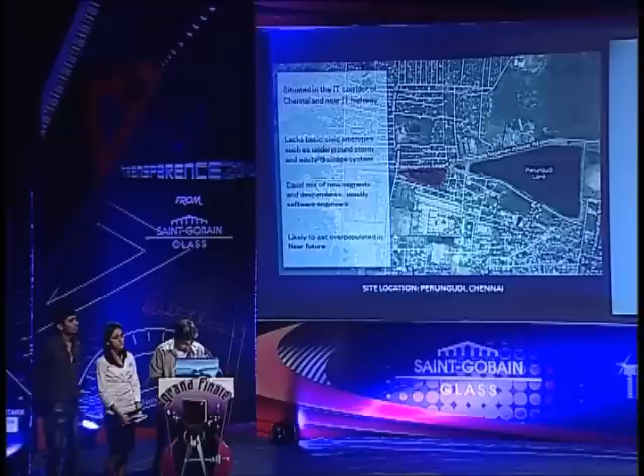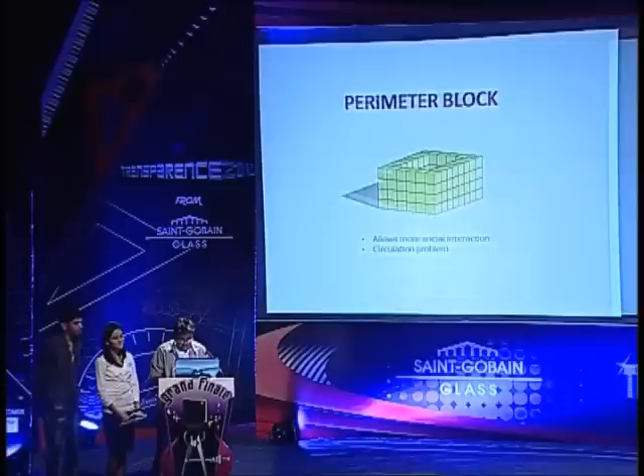To arrive at our form, we made a close study of the pros and cons of present housing patterns. The skyscraper pattern has high maximum population but has a problem of shading and ventilation. The perimeter block allows more social interaction but has circulation problems. The unit modular provides individual space units but has less social interaction. The modernist slab has maximum population fitting but has a problem of natural light.

Based on the study, we formulated our aim as to maximize the number of dwelling units and provide better space allocation, maximum light and ventilation, to have a unified structure with less class disparity and provide more social interaction. Keeping in mind the site attributes like sun path diagram, rainfall, and temperature, we evolved our design process in the following way.

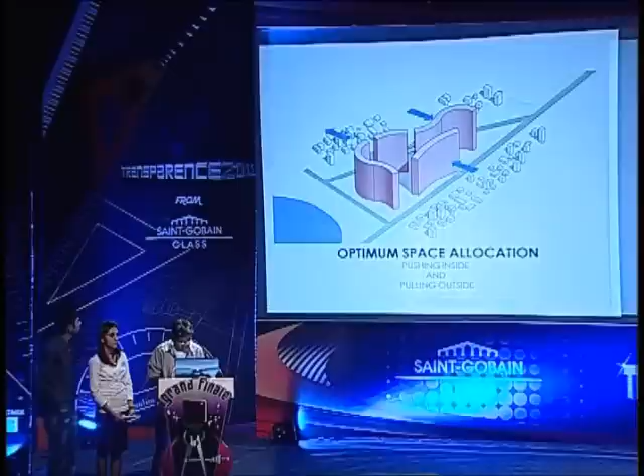For maximizing the population, a perimeter block was selected. This was pushed in and pulled out at strategic points to make space for circulation and service units. Keeping in mind the wind direction, height variation was made at certain points to catch maximum wind inside the site. The individual blocks were staggered away from each other.

It allowed 4 open sides to the unit blocks, providing proper ventilation. Climatic simulation showed that it helped in reducing building temperature by convective cooling. Regular punctures inside the form helped to make the building cyclone resistant.

Research on biomimicry and green architecture shows that people are more comfortable with naturally occurring, free-flowing structures. Our design maintains the same fluidity and at the same time maintains the linearity of unit blocks. So summing up the entire form evolution process, we reveal to you Sharanam, Housing for Future.

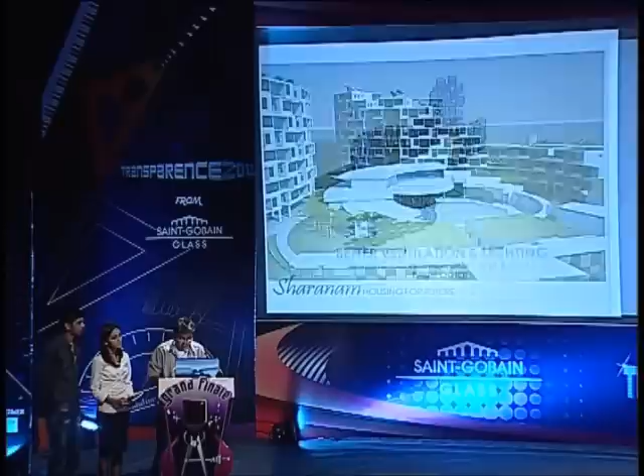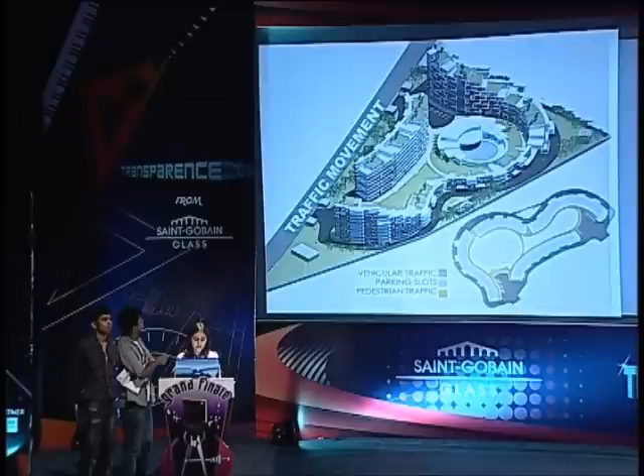I'll introduce the site plan. The site has basically 2 entries from the main road. The dwelling unit blocks are spread around the periphery. The lower 1 BHK units are 10 in number, the 35 2 BHK units, the 30 3 BHK 2-toilet units, and the 44 3 BHK 3-toilet units. Thus, we arrive at a sum of 119 flats.

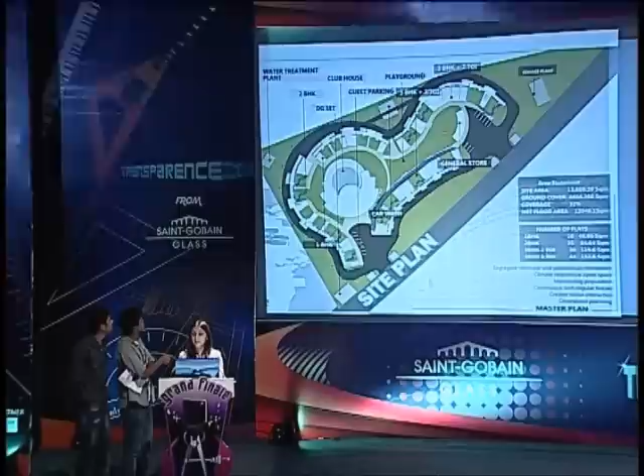The clubhouse, the playground, the garden, and the general store are centrally located. They occupy the central site and make it an interactive zone. The vehicular traffic is completely segregated from the pedestrian traffic, making the central region safer for the older age and the kids. The parking is at the ground level of each block. Special guest parking slots are provided in the front.

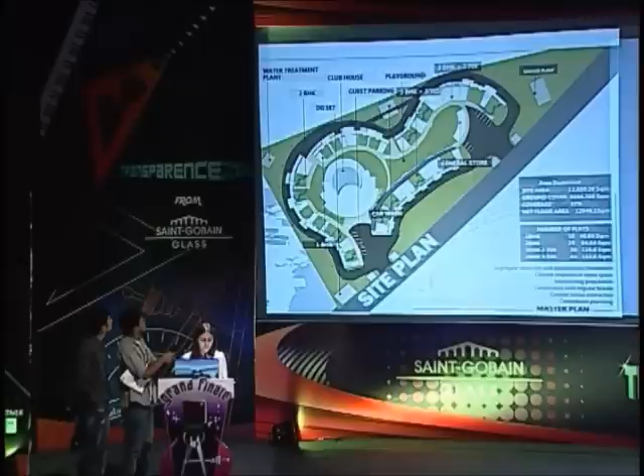Coming to the services, the DG set is placed near gate number 1. The water treatment plant is on one side. The car wash area is so placed that it's least visible, but it is centrally located. The sewage treatment plant is placed such that the wind takes the foul smell away from the site.

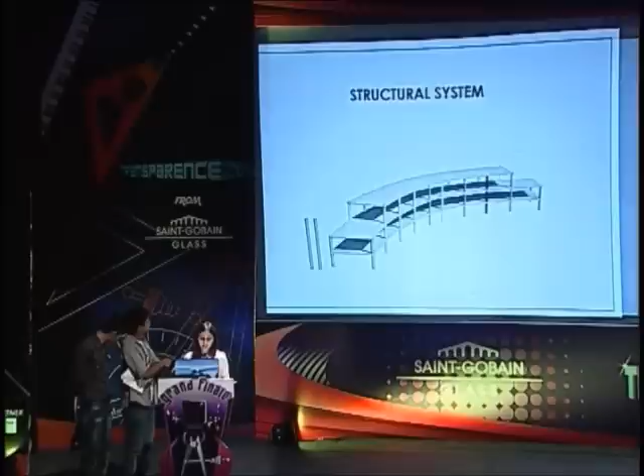Now, the structure system is a simple column beam grid. The corridors are kept offset from the block and the service lines run between them. Accessibility is given from the corridors to these service lines.

Now, the trapezoidal unit was the best fit for the curvilinear form we were trying to achieve. At the same time, this helped us avoid sharp corners. Now, the block layout.

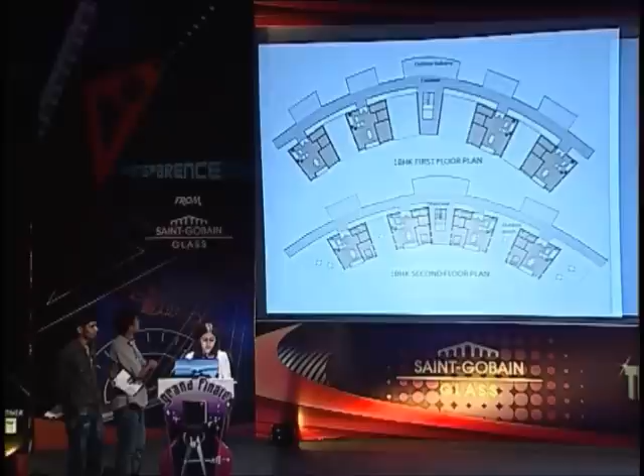As visible, each unit has a separate private open space to its side to avoid the feeling of alienation from the ground, which is common among upper floor residents. Each unit also enjoys 4-side ventilation, which relieves humidity and increases thermal comfort through convective cooling.

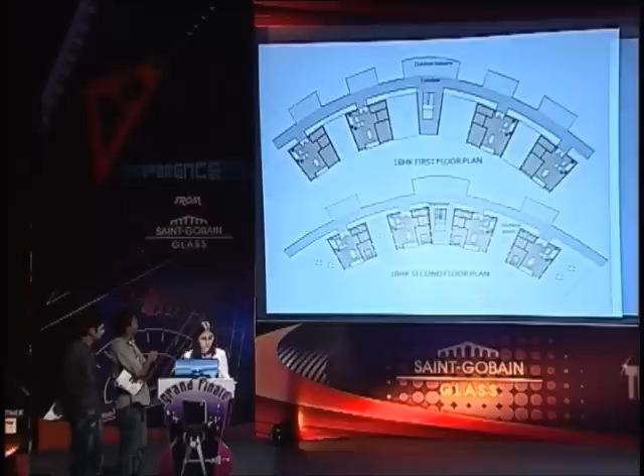The corridors are kept offset and spill-out regions are provided in the corridors for social interaction. These spaces are staggered over one another throughout the block, and this also helps in easy fire landing in case of fire.

Now, the vertical circulation is provided at optimum intervals to reduce the walking distance in the corridor.

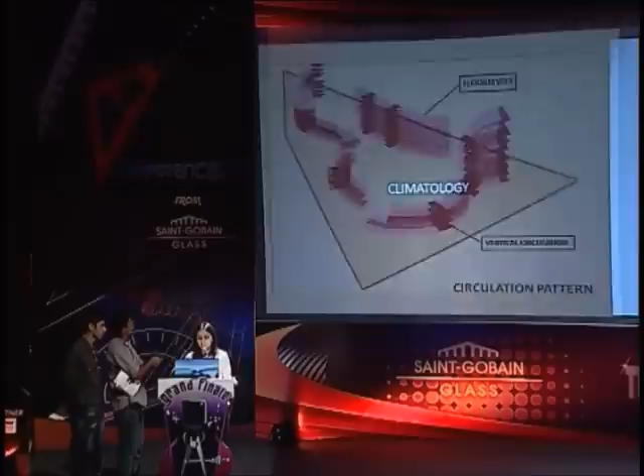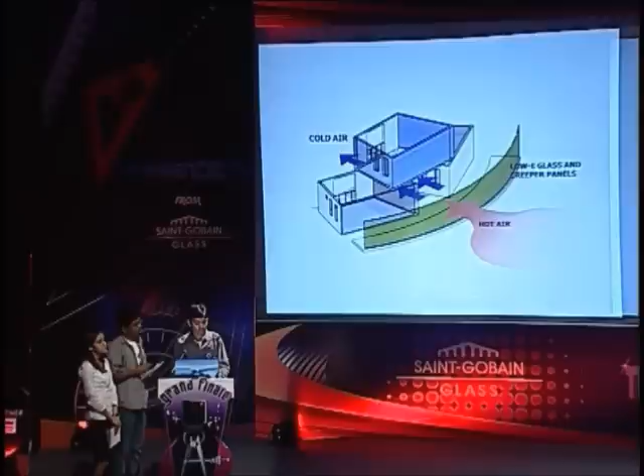Moving on to the climatic inferences we arrived at during the design process, the first one was to put a combination of separate low-E glass panels along with creeper panels on the exterior facade of the corridor. As a result, the wind that passed through them got cooled, maintaining thermal comfort conditions in the vicinity. This slide shows a closer look of the panel, which also creates a pleasing appearance for the exterior of the building.

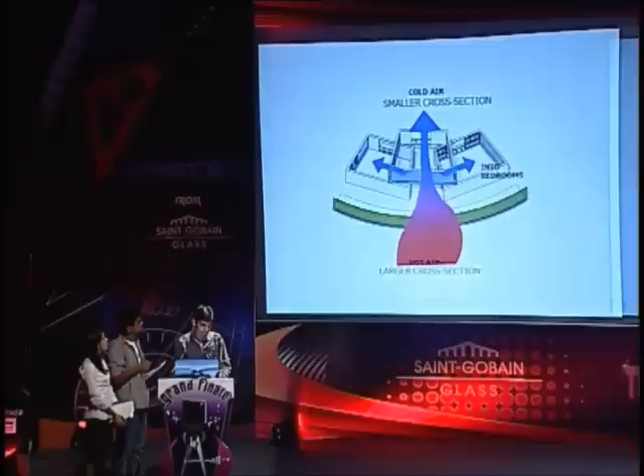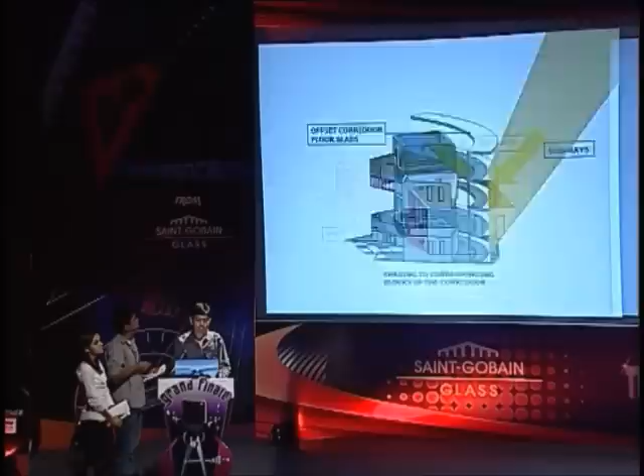Here we observe that the orientation of the building is perpendicular to the direction of wind, so air is forced from a large section to a smaller section, making it relatively cooler when it gets into the living zones. With regards to sun protection and shading, each offsetted corridor slab acts as a shading device for the corresponding blocks below it, protecting them from the harsh sun during noon.

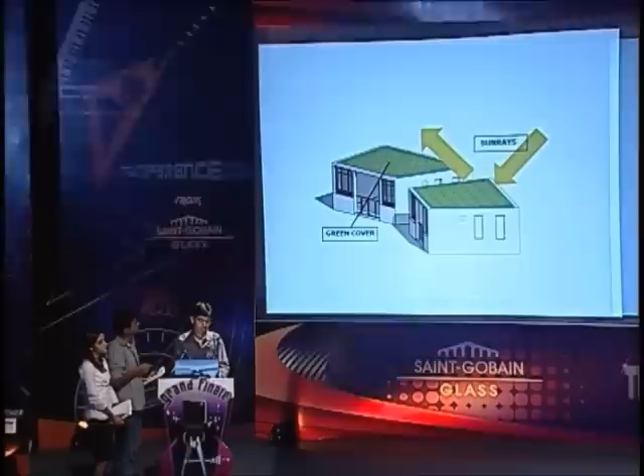Green cover is given on the roofs of the top blocks, which act as thermal insulators against direct sun rays. The offsetted corridors and the blocks create a stack effect between them such that warm air below rises up, creating a pressure difference for the cooler air to come in.

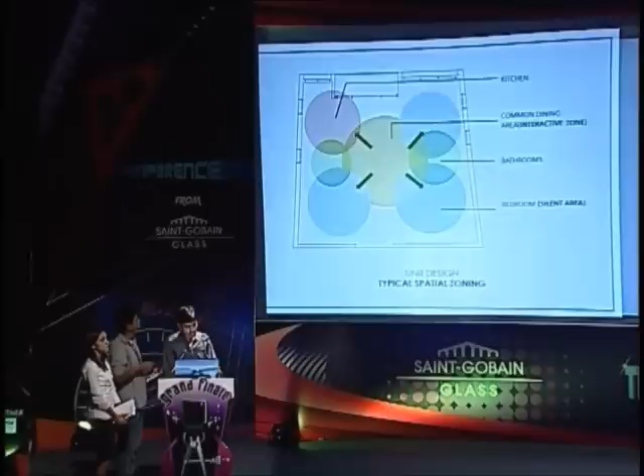Now let's have a look at the spatial zoning. Zoning has been done in a way so as to maximize interaction among family members. Hence, living, dining, and the balcony areas are given a central spot while the bedroom is a silent zone.

Coming to the unit plans and some interior views, we have a 1 BHK plan, 2 BHK, 3 BHK 3 toilet, and 3 BHK 2 toilet.

Now here's a short video of the interiors of the dwelling units.

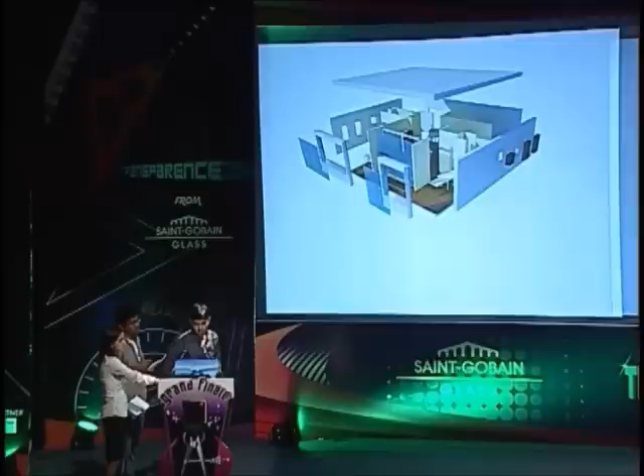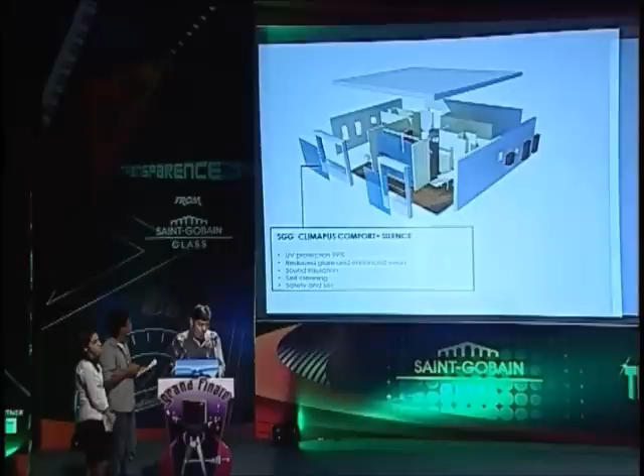Now this is an exploded view of the block showing glass details. First, we have given SGG Climaplus Comfort Plus Silence on the exterior facade. Because it is self-cleaning and has insulation properties, it also enhances vision in the interiors by reducing glare.

On the interior sides, we have given SGG Lumitop. It traps diffuse light and redirects it into the living zones.

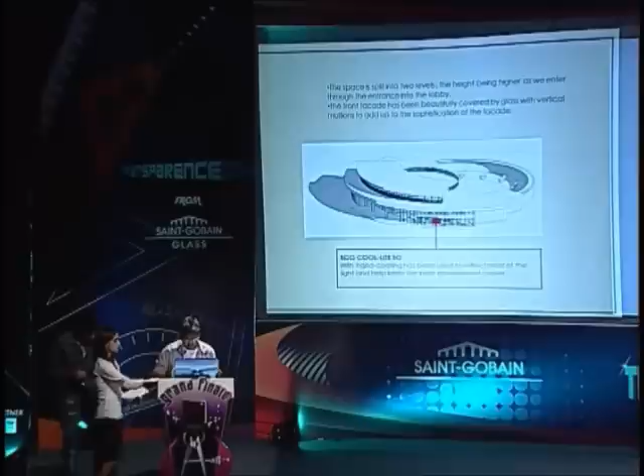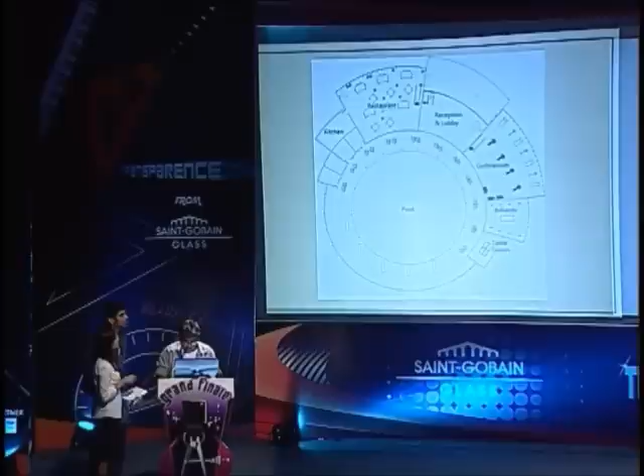Now coming to the clubhouse, it's split into 2 levels, with a higher level at the entrance. In the floor plan, we observe there is an open swimming pool with recreational centers like a restaurant, gymnasium, billiards, and table tennis rooms around the periphery.

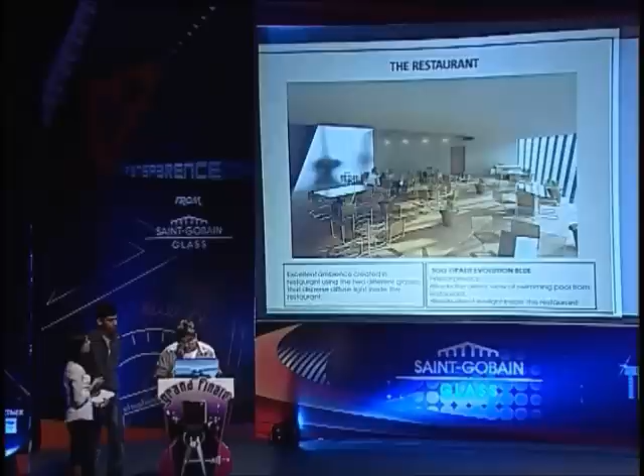Here we have an excellent view of the restaurant. The facade has SGG Opalite Evolution Blue. It blocks the direct view of the restaurant into the swimming pool, while at the same time blocking direct sunlight inside the restaurant.

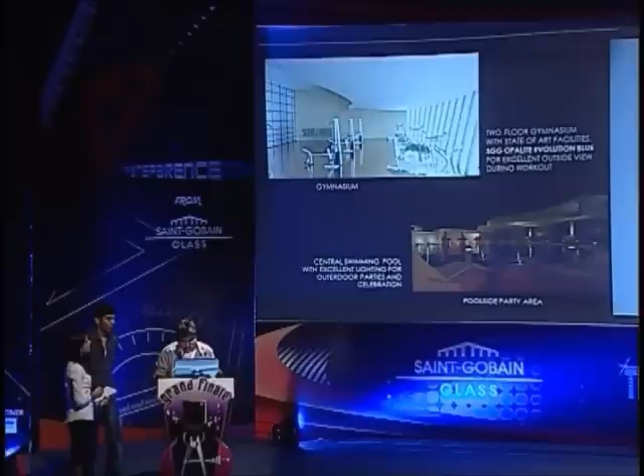Here we have a view of the gymnasium with state-of-the-art facilities, using SGG Opalite Evolution Blue for an excellent outside view during workout. The swimming pool at the center has excellent lighting that could be used for outdoor parties and celebrations at night.

Intelligent landscaping features have been incorporated throughout the site. Thick foliage trees are planted on the front to reduce roadside noise.

8 minutes, carry on.

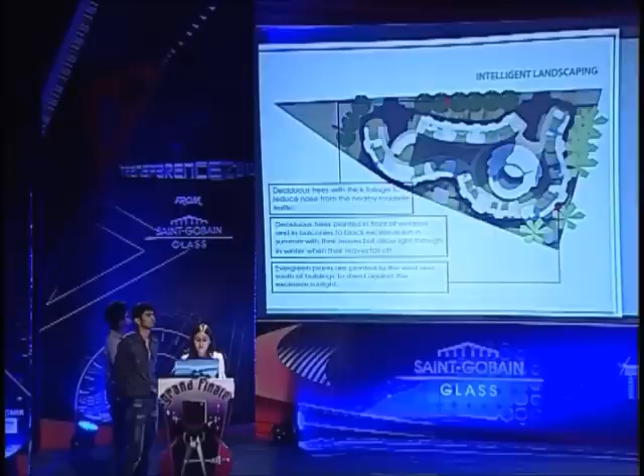Thick foliage trees are planted on the front to reduce roadside noise. Deciduous trees are planted in front of the windows and in the balconies to block excessive sun in the summers, but allow light in the winters when the leaves fall off. Evergreen plants are planted on the west and south facade of the southern side of the building to shield against excessive sunlight.

The sustainability features incorporated in the site are turf stone pavements with pores which reduce runoff water during the rainy season. The grey water and the water from the car wash is recycled for gardening. Water-saving fittings help reduce water consumption by 40%, and rainwater harvesting is provided in all the blocks.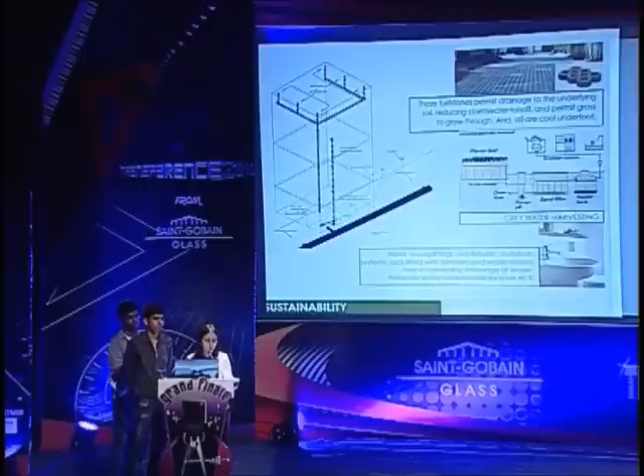Thus, on one hand, Sharnam is sustainable and close to nature, and on the other hand, it gives competition to the futuristic structures in terms of the number of dwellers. This makes it an ideal futuristic house.

Where lives come true and humanity dwells, a sight to dream of, not to tell. Ladies and gentlemen, we have Sharnam for you.